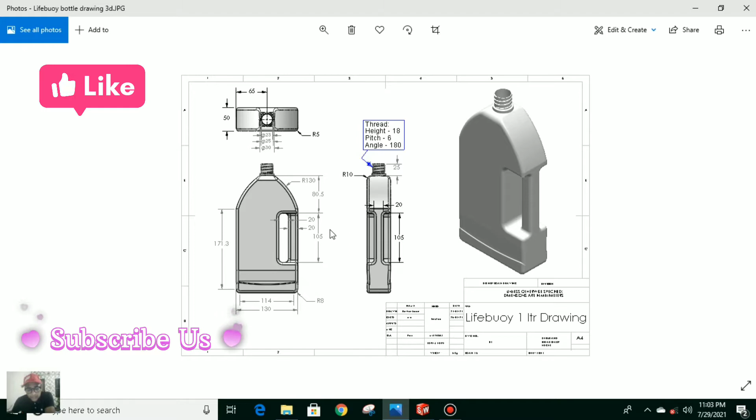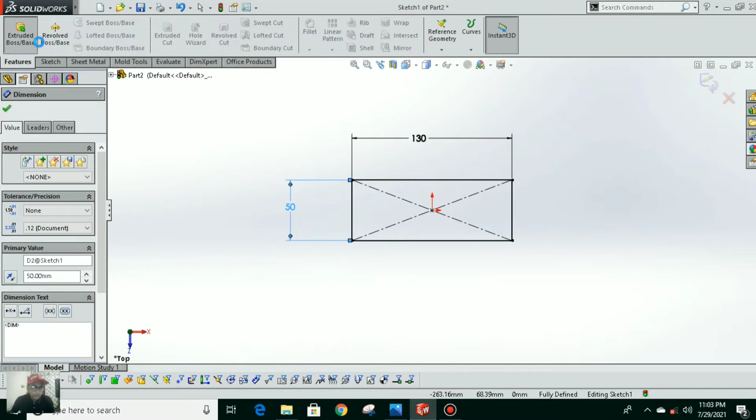Let's get started. First we're going to draw a rectangle of 130 by 50 mm. Let's go to the Solidworks part. We need to extrude it up to 170 mm. Go to front plane, choose top plane, sketch. This is 50 mm. Go to feature, extrude boss base, 170 mm.

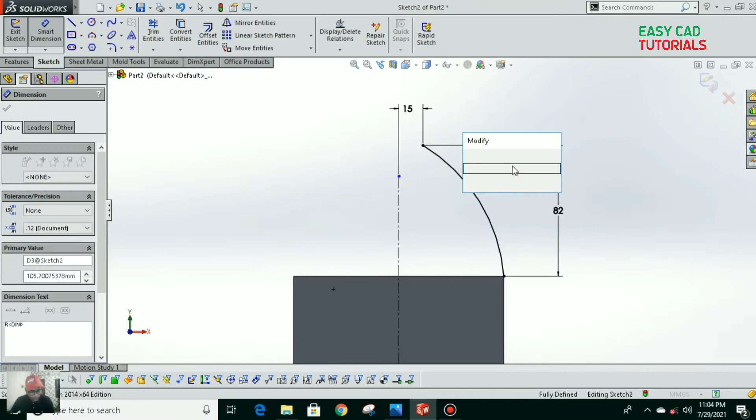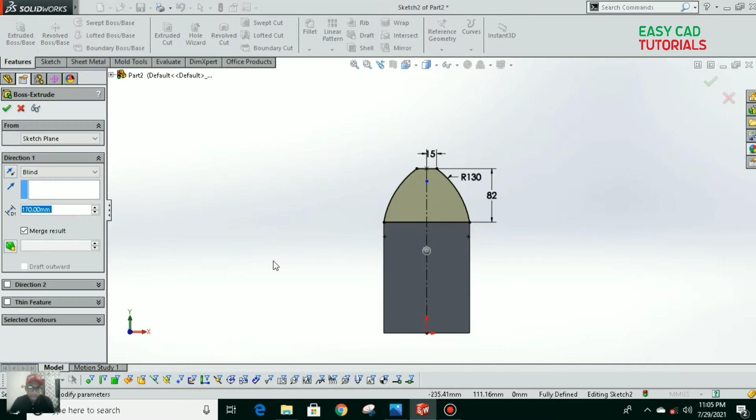Select line and a line. Now just select this sketch, press go to mirror entities, mirror about this line. Now go to the extruded boss base and select blind in the opposite direction, 15 mm. Make sure you have checked merge results.

Now select this face, plane normal to the sketch. Let's see the dimensions over here. As you can see, this is 105 from here, from this point to this, 82 mm. This dimension is 82 mm.

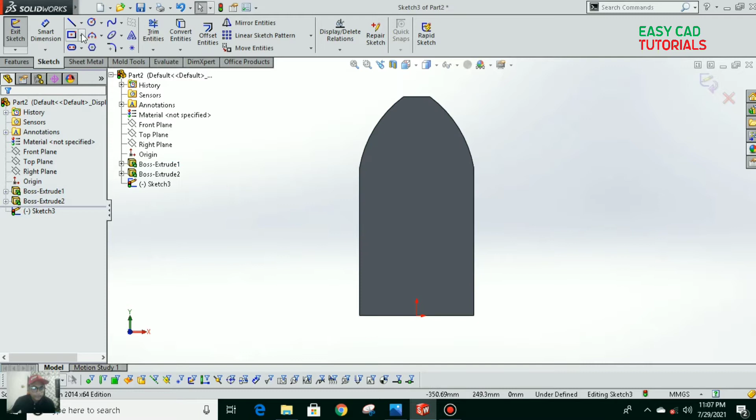So the gap between is 20 mm. We need to draw this gap, 20 mm and 105. So simply corner rectangle, draw a corner rectangle from here to here. Now select dimension, smart dimension. This is 20 mm and this is also 20 mm.

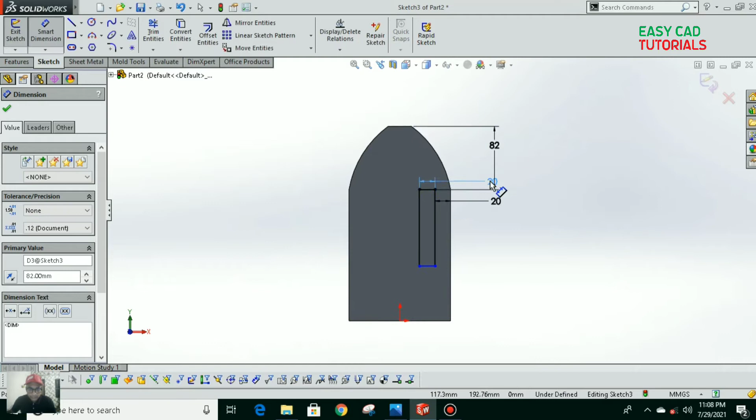And from this line to that line is 82 mm. And make sure you have the radius here. So just go to fillet, select this face, 5 mm. This is 5.

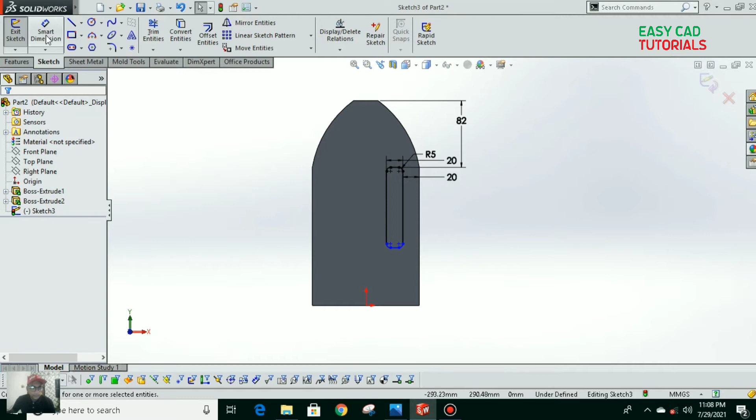And from this line to that line, 105 mm. Go to extruded cut, up to next. Select okay. Now select this face, plane normal to go to sketch.

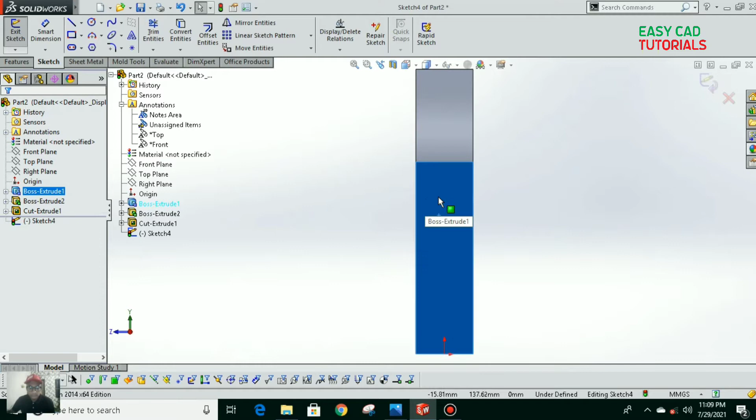Select the center line, and you can see this is 20 mm. So we need to draw one rectangle, two rectangles here, 15 mm, 15 mm. Let's just draw a rectangle, the dimension is 15 mm, and the length of the rectangle is 105.

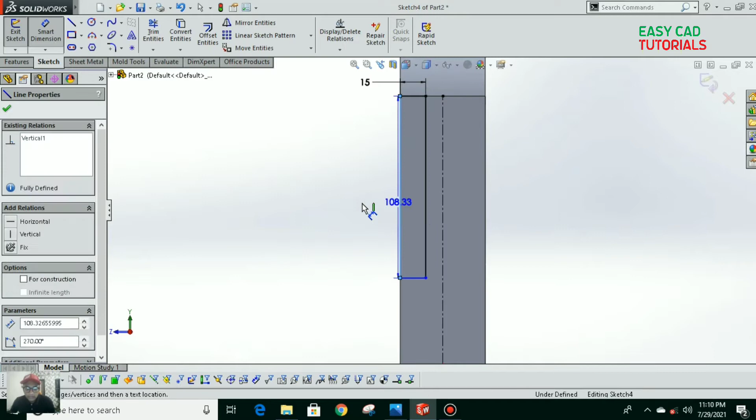We also need this one. Go to mirror entities, select your sketch, mirror above. Now go to extruded cut, select up to next.

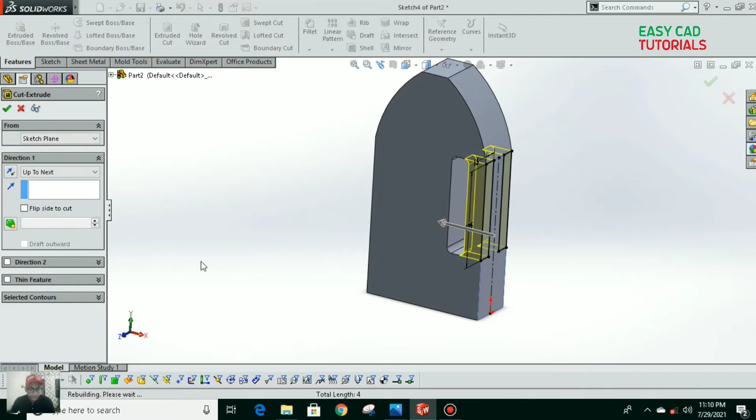Very nice. So now let's select this face and plane normal to go to sketch. Draw a circle, of 28 mm, actually 30 mm, and select offset entities.

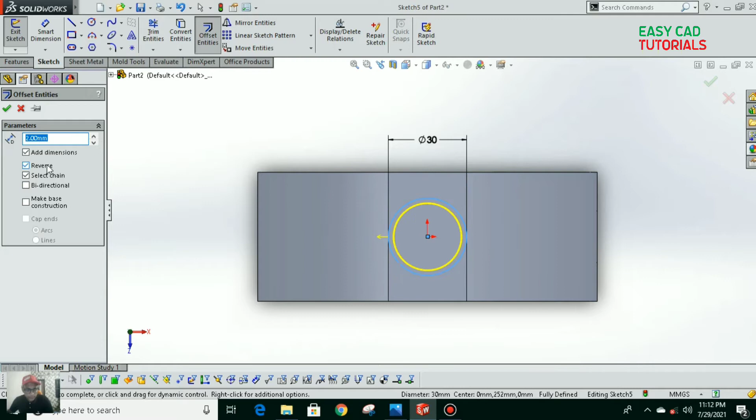Another 2 mm, reverse it, 2 mm, 3 mm, 5 mm, reverse it. Sorry, 3 mm, reverse it, and circle. It's perfect. Now go to extrude boss base by 4 mm.

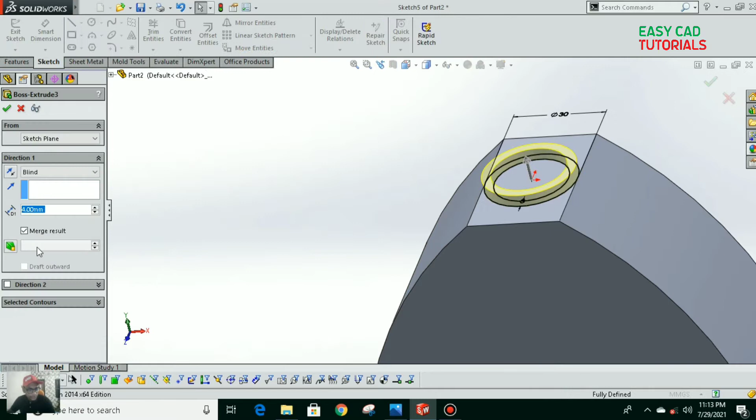Make sure you check this box. Select this face. Actually, we need to edit the sketch first. We do not need the circle. Go edit sketch, delete the circle and exit.

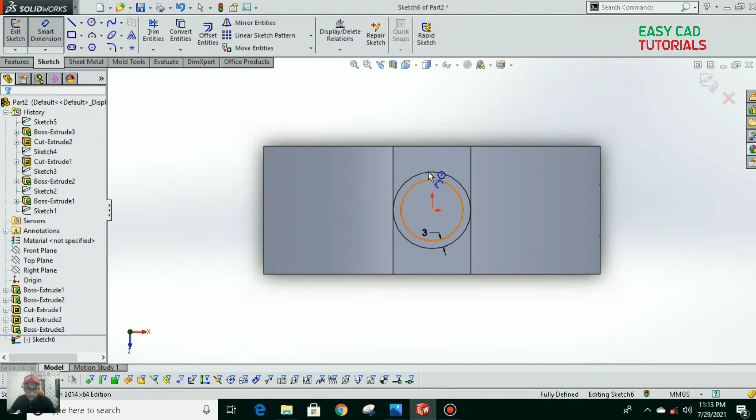Select this face again, plane normal to sketch. Offset entities by, and the inner circle 24. This is 23 mm, sorry, this is 23 mm. Go to extrude boss base, right, 21 mm.

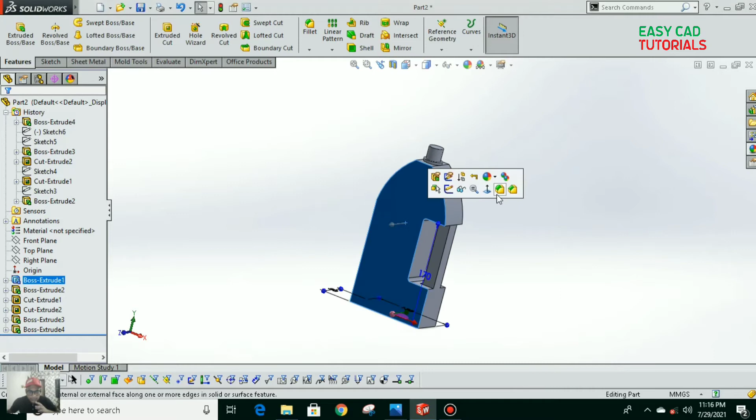So let's just select this face and go to the fillet, make sure you have 10 mm here. This is also 10 mm fillet. It looks nice. If you want, you can fillet it by less. So let's just do another fillet. This face, not this face, this edge, fillet by 4 mm, 5 mm.

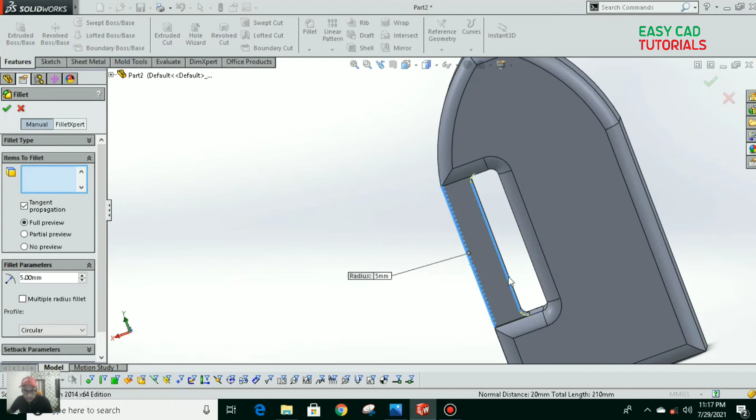Sorry, 5 mm. So select this part here, this part, and that part. Fillet it. This is also, and also this part here.

Okay, keep it for later. Select this edge, go to fillet it by 10 mm. Okay, this is also 10 mm.

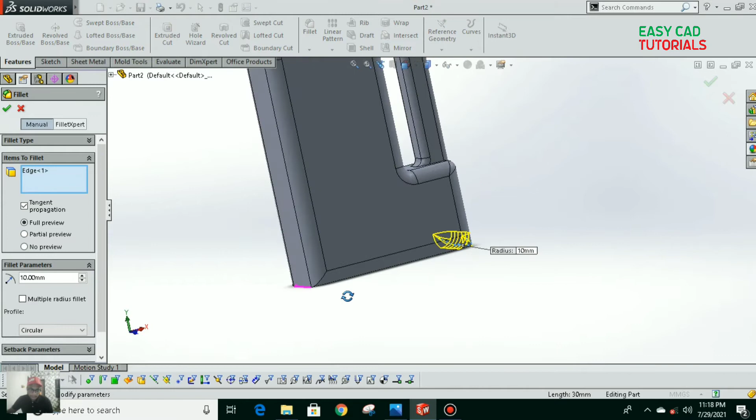Also select this edge, go to fillet 5 mm. Okay, 1 mm.

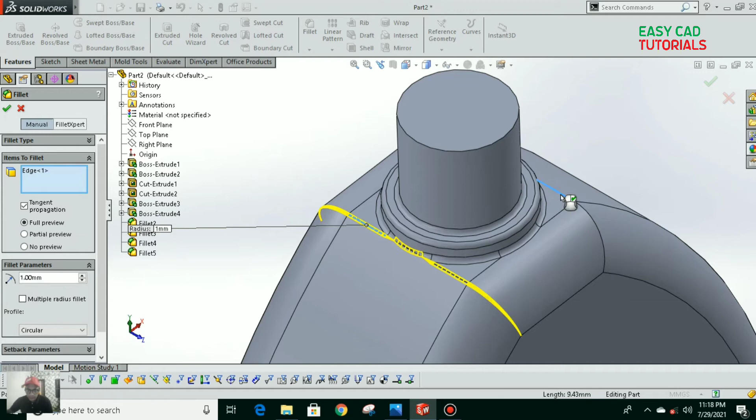Now what we're going to do is pretty simple here. Select this face, plane normal to, go to sketch and draw a normal face here with an angle.

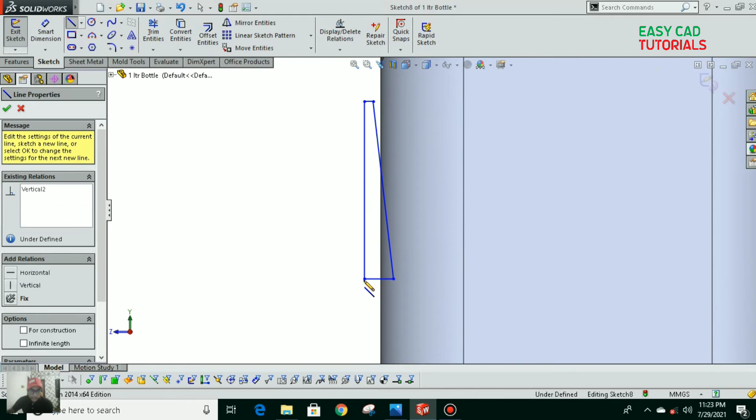Go to smart dimensions, select this line, and this point is 25 mm, and from the angle this line is going to 85 degrees. Also this point and that point dimension is 1 mm.

Okay, perfect. Now go to extrude cut, through all.

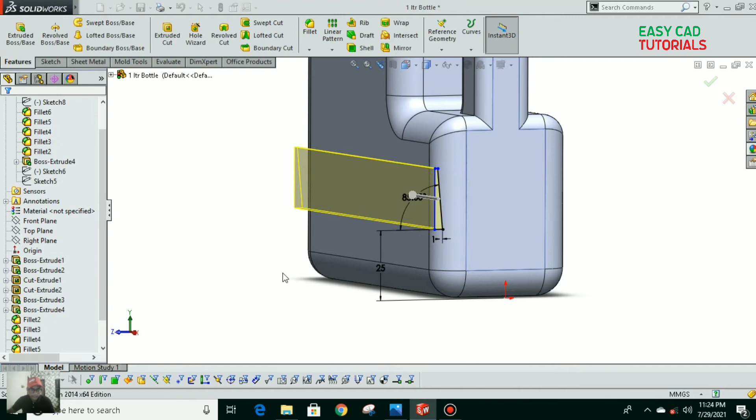Now go to fillet. Select this edge. Go to fillet. This edge also. Delete this edge first, so inside edge. Okay, perfect, select OK.

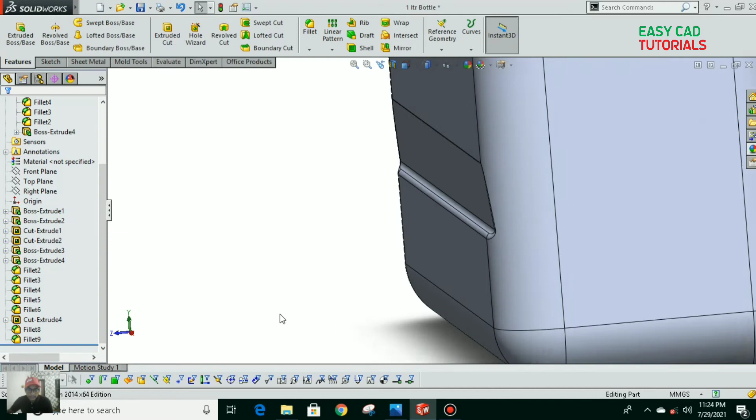Also select this edge, fillet it by 1 mm. And select this fillet to fillet and cut extrude. Mirror it through front plane and select OK.

Okay, there is maybe some kind of error. Let me first mirror the cut extrude and front plane.

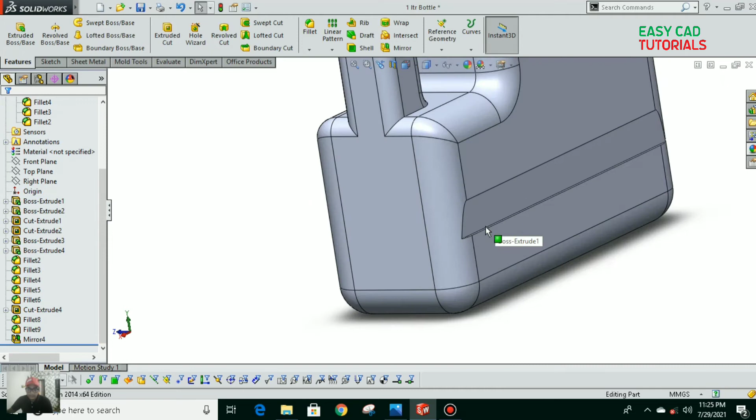Now again, just select this edge, go to fillet 1 mm. Now select this edge and go to fillet by 1 mm. Okay, no problem.

Now we are going to shell this whole bottle. Shell it by 2 mm. Okay perfect, actually the bottle thickness is 1.5 mm.

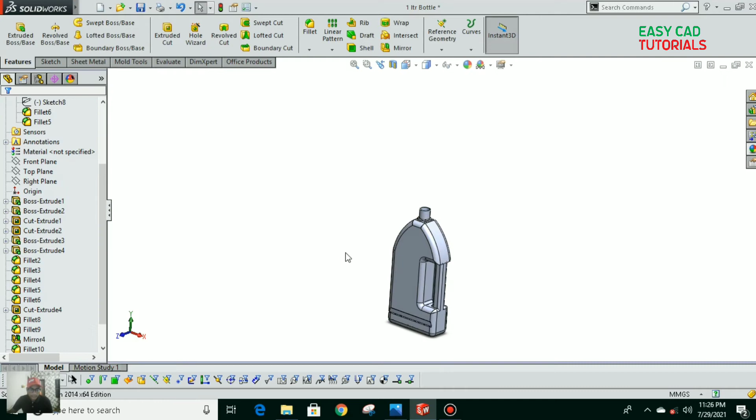Okay, perfect, you see inside. See, the bottle is shelled all inside also. Perfectly shelled. Okay, now what we're going to do is select this edge, go to sketch, and

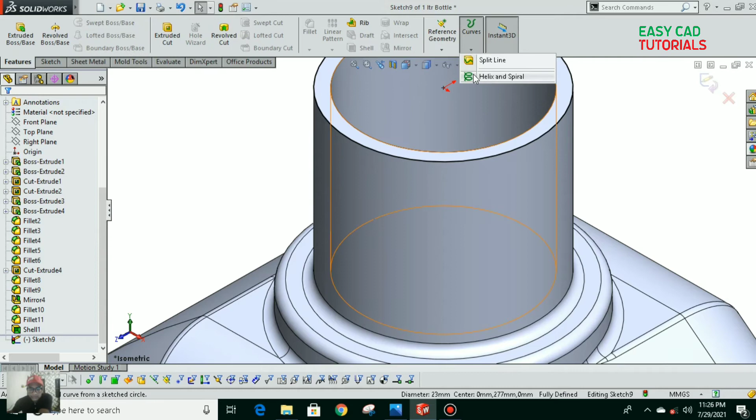select this face, convert entities. This will take some time. Okay, now go to curves, helix and spiral, reverse direction, height and pitch, 18 mm.

Let's go, the height is 25. Okay, the height is 18 mm, pitch 6, 180 degree angle. Height is 18 mm, pitch 6 mm, and this I will do to 0 mm.

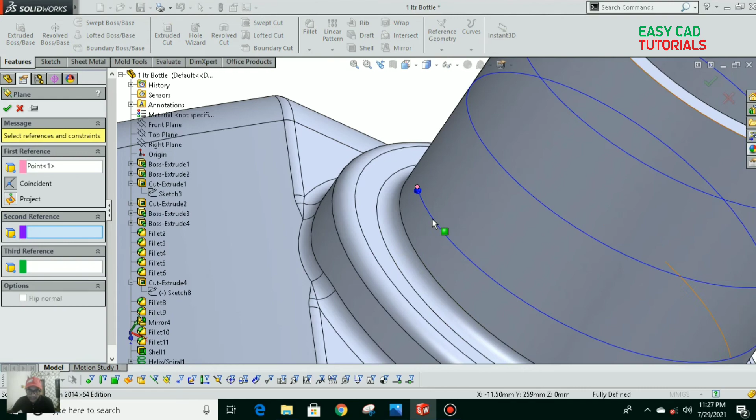Okay, perfect, clockwise. Now simply select this point, go to reference geometry plane. Okay, now select this helix. Select OK. In that way, actually, the plane, go to plane normal to, go to sketch, and select polygon and 3.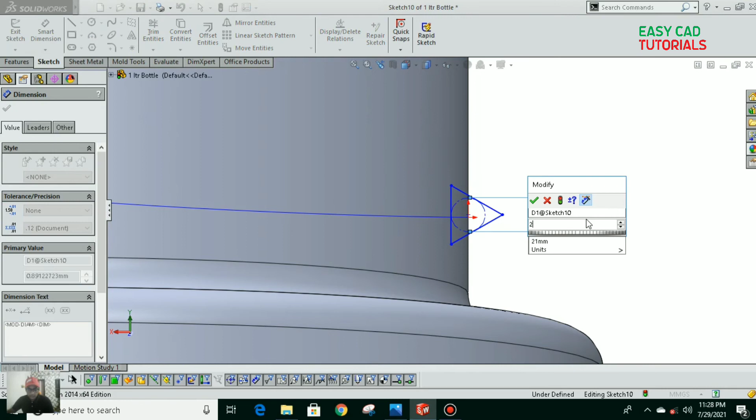Okay, now select polygon here, dimension it 2 mm. Okay, 2 mm.

Now fillet this part here by 0.5 mm. Go to exit sketch, sweep boss base.

So this is automatically selected our sketch. We need to select the helix. So click here and select the helix, and you can see the extra part here.

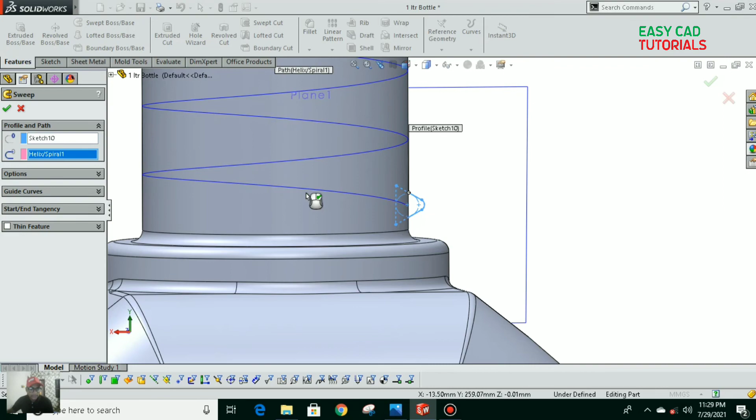So go to options, merge, align with, and faces. Select this and this face wheel, and also make it merge tangent faces. Okay, and go okay, perfect. And select this plane and hide it.

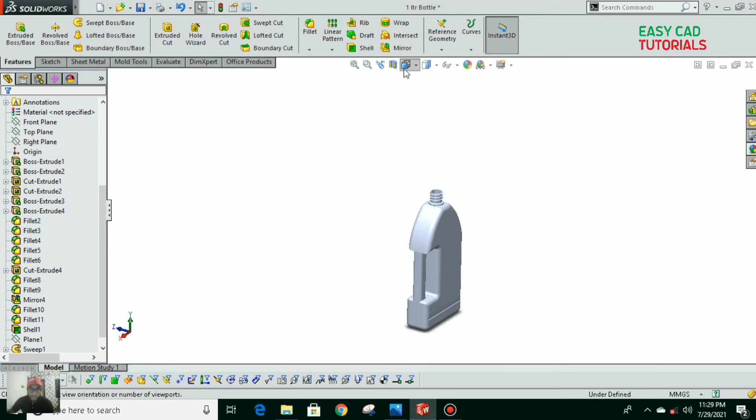Our bottle is ready, and this is how you design a bottle. Okay.

So if you want, you can render it though. You can shade it, go to shadows and perspective view.

Okay, now select add-ins from the options, PhotoView 360, and you can see the render tools here. Go to preview window. Oh, before render, you need to add appearance.

Let's add some appearance here. And go to appearance. This is plastic, of course. It was white.

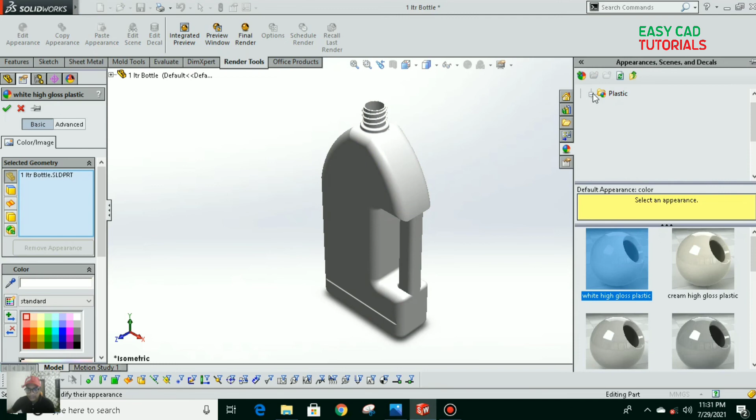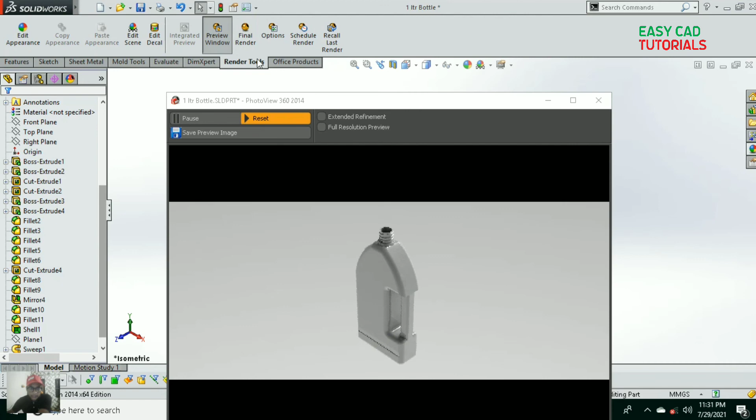Okay, now go to preview window, and okay, and go to the final render. This will take some time, so I'm gonna skip this part.

So our render is complete here, and this is our final bottle. So save the images wherever you want.